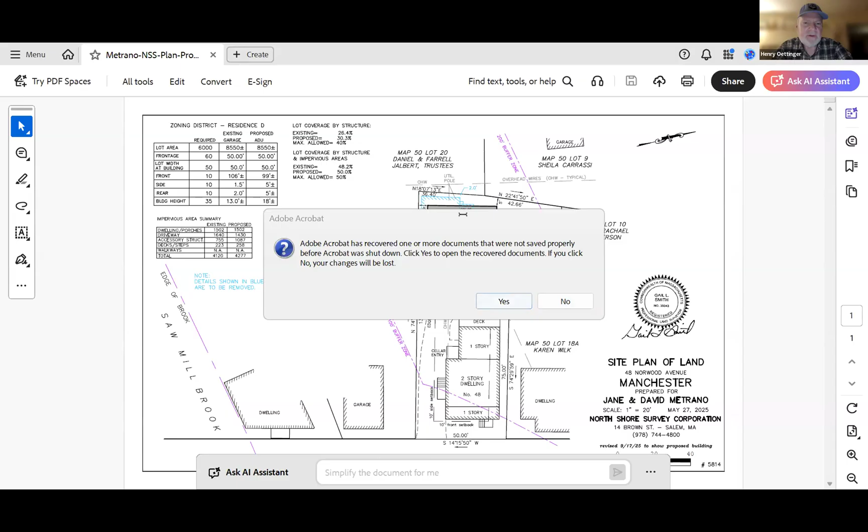The proposed building, Henry, is exactly the same size as what we're planning on doing. We haven't changed anything except for the kitchen layout, and it's moving a little further forward. If you look at the plot plan there to the right, you'll see the existing is outlined in blue, and we're moving it off of the property line to create that required setback.

So there's a decrease in pervious area due to the building itself, but there's probably an offset because of the driveway. And so the net change in pervious area - that's our big question for you, Mr. Gaddis. Net change in impervious area, it's not a lot. See the summary table on the left, impervious area summary.

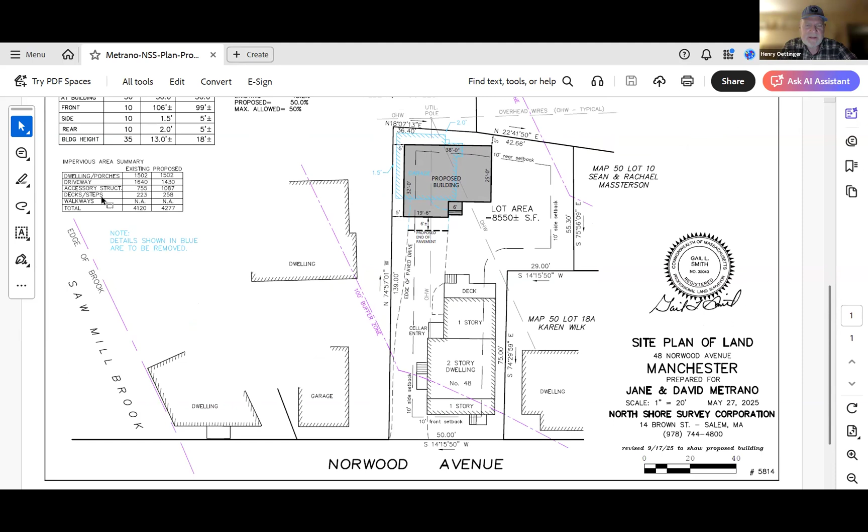But that's now changed, I think, Steve - is that right? Let's see, no, it hasn't changed. So if you look at the driveway, it's 1,640 square feet. We're knocking that down 210 square feet less. Some of which gets covered up by a building, but some of which doesn't.

So the net calculation is that we do lose pervious area by 150, 157 square feet. Got it. So we could certainly require a modest amount of mitigation for that, although I'm not sure where - maybe surrounding the building in the back.

My memory from living there a while ago is that behind the building it's kind of overgrown. Yeah, and there'll be a bit more space there now than previously, so that could become an area for planting some native shrubs, ferns, or ground cover.

Roughly speaking, that would be about 45 by 8, so more than the 157 incremental impervious, by 3 to 2. I'm doing this in my head, so I'm not sure. You're in the ballpark, accurately.

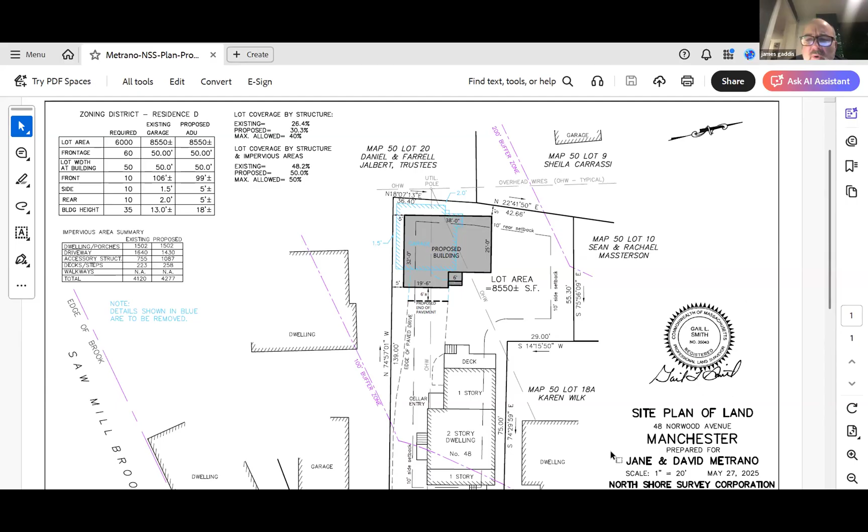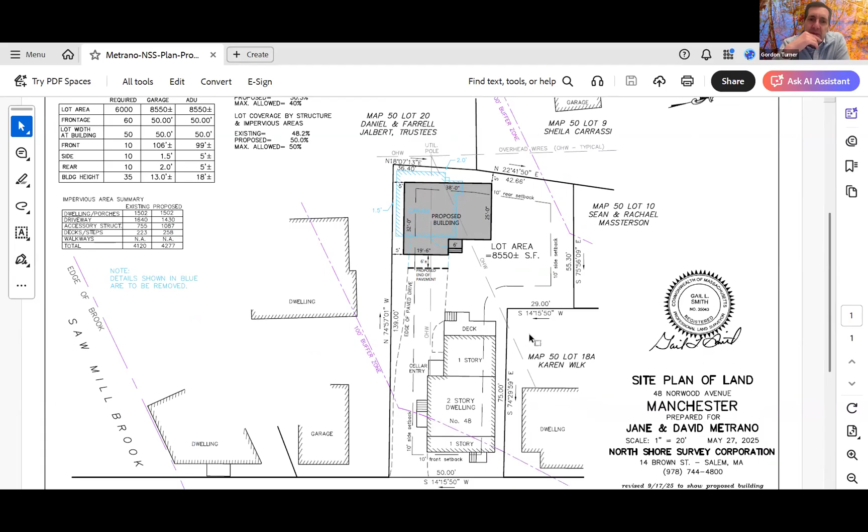So when we were on the site visit, I thought there was talk about moving the pavement and having it stop at the back of the existing house, but maybe you can clarify. It looks here like the pavement goes all the way up to about 6 feet from the house. Is that right? No, that is not correct.

Can you guys see my cursor? No, I see... We need to share the screen, because you're not seeing it if you're not sharing. Oh, okay, we're seeing Bethany's cursor now.

The pavement is not going within 6 feet. It doesn't go back that far in what we're proposing. I'm sorry we did not correct that, but the 100 square feet you're talking about that we're losing, that's where I'm a little confused. I thought we were gaining some, but I think we can make that up by bringing the pavement back. To make up 100 square feet it would only need to go back 9 feet, but we can take it back even farther than that.

What's your current plan, Jim? Is it to end it at the edge of the deck on the existing house, or further down? We don't know exactly yet what the landscape plan will be because we haven't developed it that far. We know that driveway, even through construction and demolition, is coming back. There's no reason the proposed driveway would go all the way back there—cars aren't going to go that close to the building. I'd say it's probably going to be 15 to 20 feet away, which is not marked correctly on that plan.

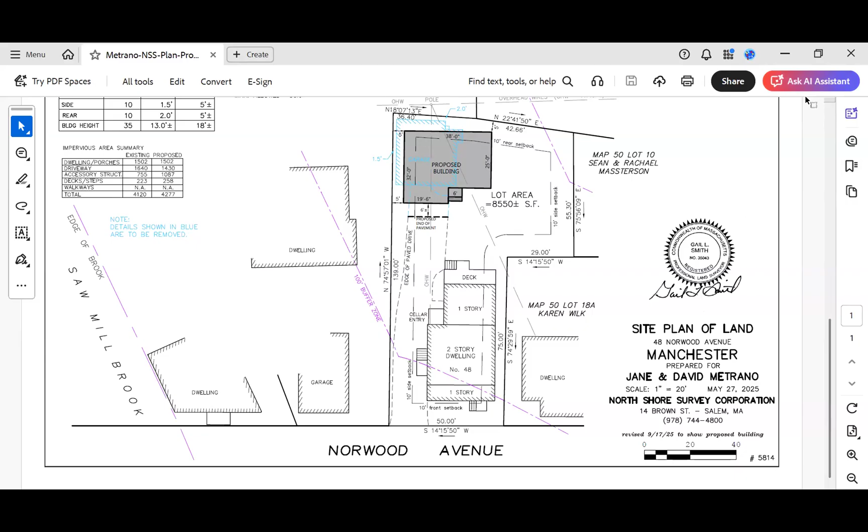Now we have new notices of intent. The first is 146 Bridge Street, Mass DEP 39-943, Jaclyn and Matthew Rossiter. This is proposed patio construction, utility improvements and landscaping within riverfront and the 100-foot buffer zone. We don't have a map and lot, but we'll stipulate that, and we'll also stipulate that notice of this hearing has been published and properly circulated, right, Bethany?

Great, okay, who's here tonight to help us understand this? Good evening, Chairman, my name is Sam Soderholm from Soderholm Custom Builders. We're the builder on the project. With me we have Matt and Jaclyn Rossiter, the new owners. I have Bob Griffin from Griffin Engineering, who helped prepare the NOI, and if needed, we have Troy and Elizabeth from Lombardi Landscape Architects and Patrick Christian from Blue Hour, who is our architect of record.

The Rossiters have gone to painstaking lengths to preserve the home and restore it. We're in the midst of that project under a building permit by right. We did have staff out to review preemptive erosion control and site limit work so that we could get going on certain aspects that are outside of the jurisdictional buffer.

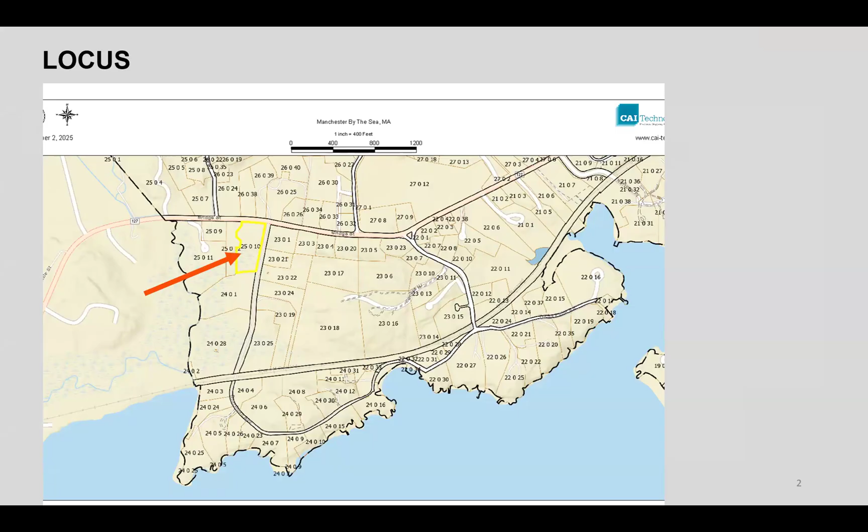I'm sorry about the noise from the phone call. Somebody's calling here.

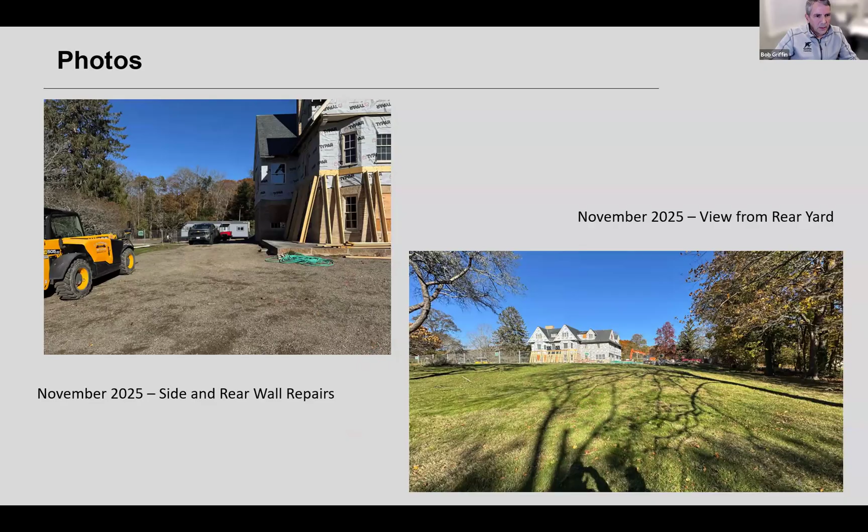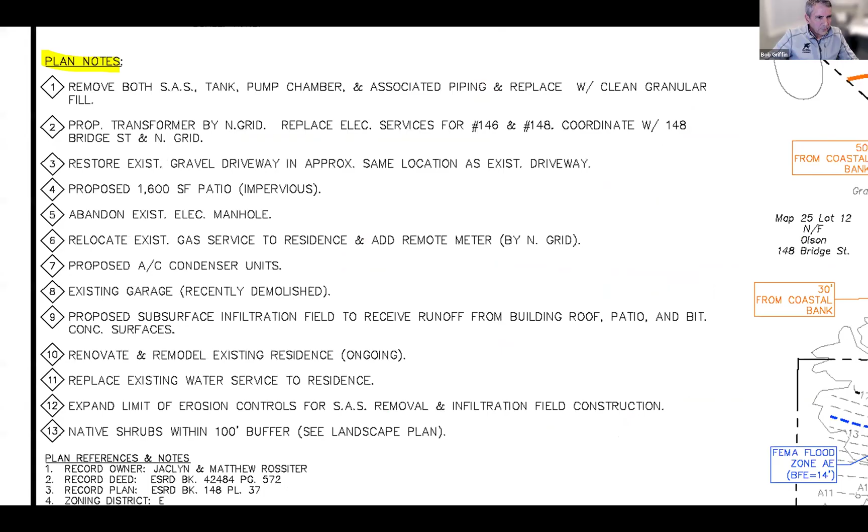We'll go through those as we go through the project, starting at the front of the house. Here's our jurisdictional line again, and the work in the jurisdictional area is a new electrical line, a new transformer—this is in the process of being coordinated with National Grid—and also a replacement of the water line to the house. It's just too small and too old, so it needs to be replaced.

The water line will go in the same location as the existing water line. National Grid will hopefully bring the electric line something pretty close to this. From the transformer, the electric services split between the two adjacent properties here, the 146 and the number of our neighbor—I'll get that before we get too far. So that's the work in the front yard.

There's some work outside of jurisdiction: a new septic system. This is an 11-bedroom house, an 11-bedroom septic system. The circular driveway is pretty much going to remain in the same location as presently exists. There's some new walkways, new shrubs and landscaping around the building. There's a garage addition which recently started construction attached to the house, and there'll be a driveway court installed in front of the garage and a little play terrace behind it.

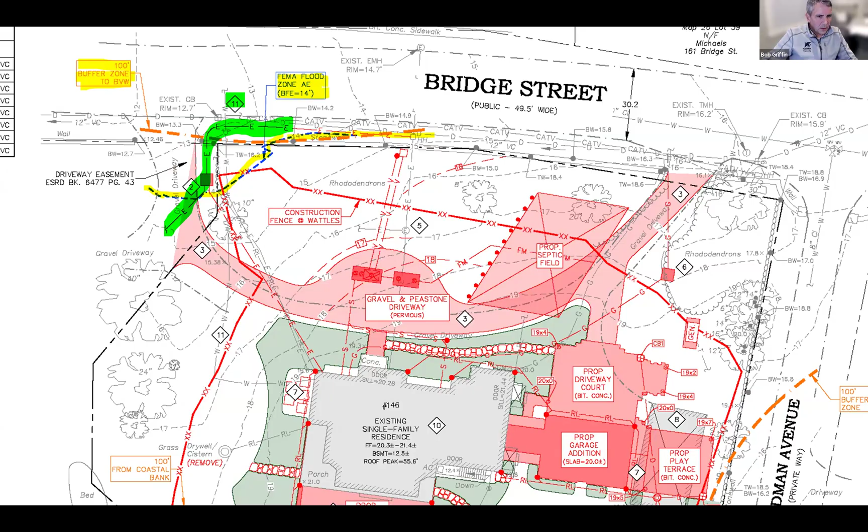I'll next go to the back of the property. The work behind the building that's in jurisdiction—again, here's that yellow line indicating the 100-foot buffer zone. This is about a 1,600 square foot patio. It will be impervious, and it will have some drain inlets to capture the stormwater runoff. It'll have a stone surface, a stone wall around the edge, stone steps and all that—about 1,600 square feet, and it'll enter the drainage system.

This square area down here is about 400 square feet. This is a new stormwater infiltration bed. It will receive the runoff from that patio, and also some runoff from the roof of the building, the garage addition, the play terrace, and the driveway court. So we've got a lot more water going into the ground as a result of our proposed improvements than currently exists.

The other thing, and Sam mentioned this a little bit, is there are two failed septic systems in the back of this property. This shaded rectangle is the older of the two, and then this rectangle here. The goal is to remove the stone, the pipes, the tanks, the manholes, all these cleanouts—there's just a whole bunch of stuff that clutters up the backyard. The goal is to remove those, replace them with clean granular soil, and put down new lawn or loam seed and landscaping in accordance with the landscaping plan.

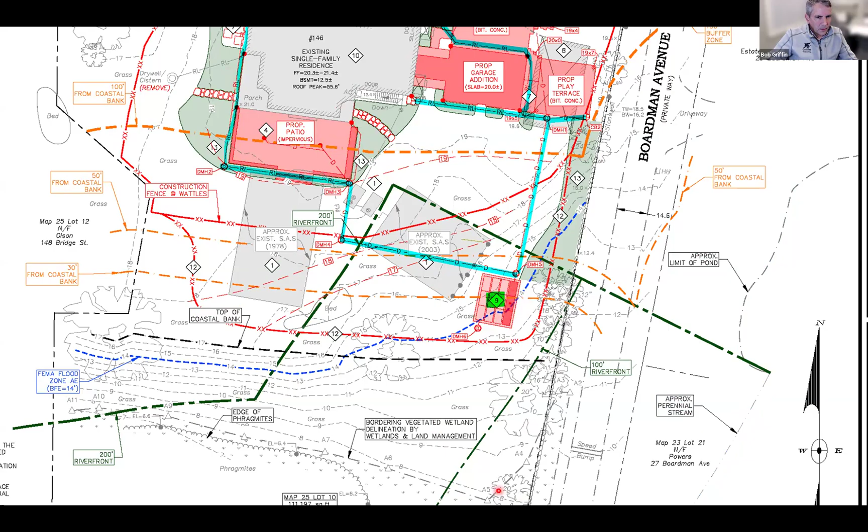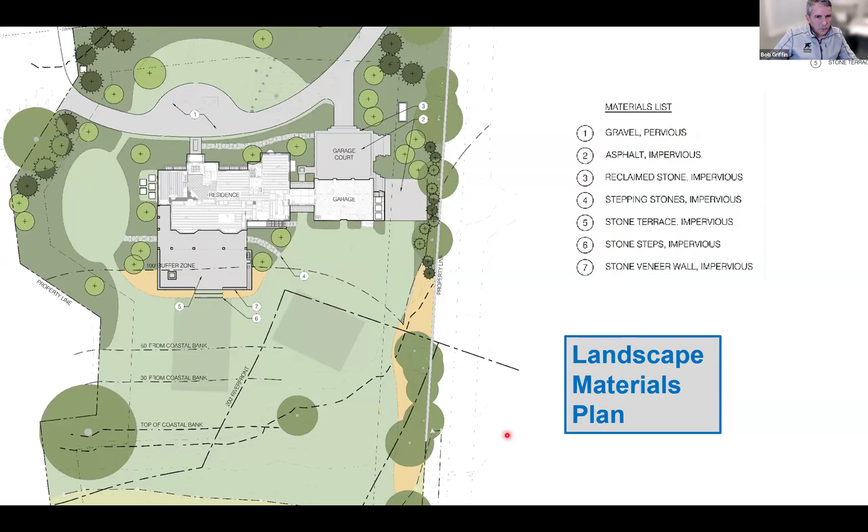That is the stone terrace. Items 5, 6, and 7 all pertain to the rear patio area here. In regards to the landscape layout, we do have some plants which I'll show you in a second, but basically these tannish colored areas are new shrubs along Boardman Avenue. There's also new beds around the entirety of the house.

There are two different shades of grass here. I think this area in the backyard will be maintained more as a conventional lawn like it is now, but there are also some darker green areas here which will be a grass species that doesn't require quite so much maintenance.

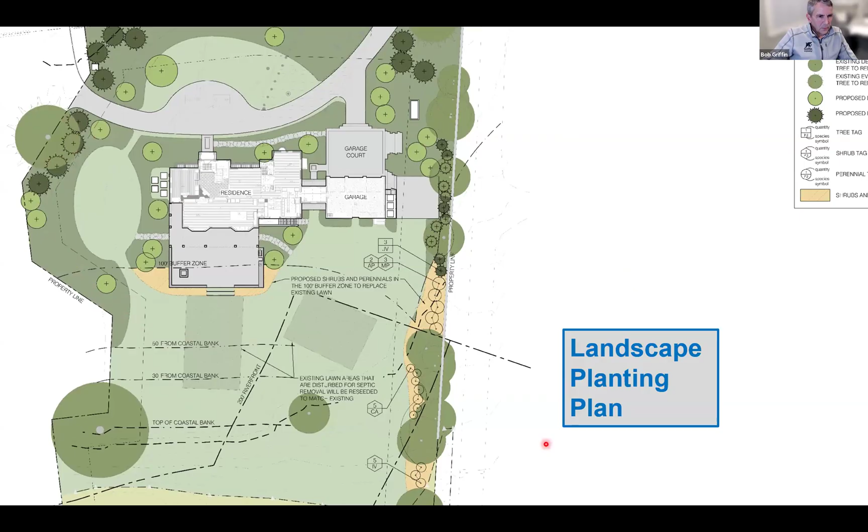Some new trees and shrubs along the property line on the east, as I mentioned a moment ago. The plans we submitted include a planting list with some of the stuff you've seen all the time - summer sweet, winterberry, northern bayberry - and there'll be other plants and shrubs, I'm sure, as the landscaping continues.

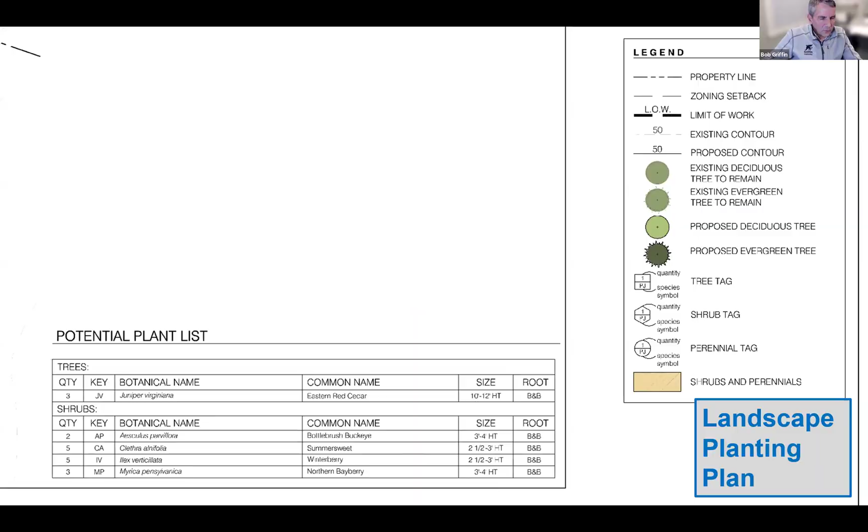I think that sort of summarizes my presentation. We'd be happy to address any questions. Before we do that, I do want to note one thing.

We did note on the DEP website today there were some questions and comments on the filing, and I have some answers to those. I'll quickly run through what DEP had on their list. They wanted us to quantify the temporary and permanent land subject to coastal storm flowage impacts.

So we do have a little bit of work in land subject to coastal storm flowage in the backyard. It's this little portion of the stormwater infiltration bed that is within the flood zone. We're not really changing grades and not changing the surface, so there's no new impervious surfaces back here, but we do have about 200 square feet of work in the land subject to coastal storm flowage in the backyard.

In the front yard we have a new transformer, some electrical lines, and some water main work, a little bit of driveway reconstruction work - about 700 square feet of work in this area out front in the land subject to coastal storm flowage. We'll provide that information in writing to you and to DEP.

They also asked how the mean annual high water line was determined - they're referring to the riverfront calculation, this 100-foot line and the 200-foot line. The way we got that line was by tracing the aerial photograph, and we have good registration on our aerial photographs.

We have a very narrow stream, only a few feet wide, so I feel very good about the locations of our 100 and 200-foot lines. I think they've been accurately defined here.

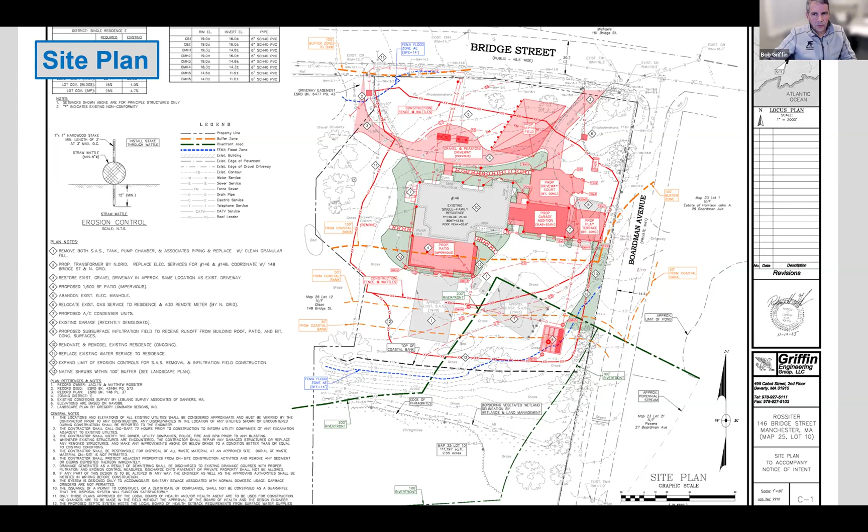Great, thank you. David, you had some questions? I had a question, somewhat related to Henry's. The two failed septic systems - you said you're going to try to clean those up and use some clean fill for those. Do you plan to raise the level of the existing ground with that new fill? No, we're proposing to keep it a nice level backyard. No significant topographic alterations.

Okay, thank you. Other questions or comments from the commission? Any questions or comments from the public? Try to scan the audience here, see if anybody has raised a hand. I'm not seeing any.

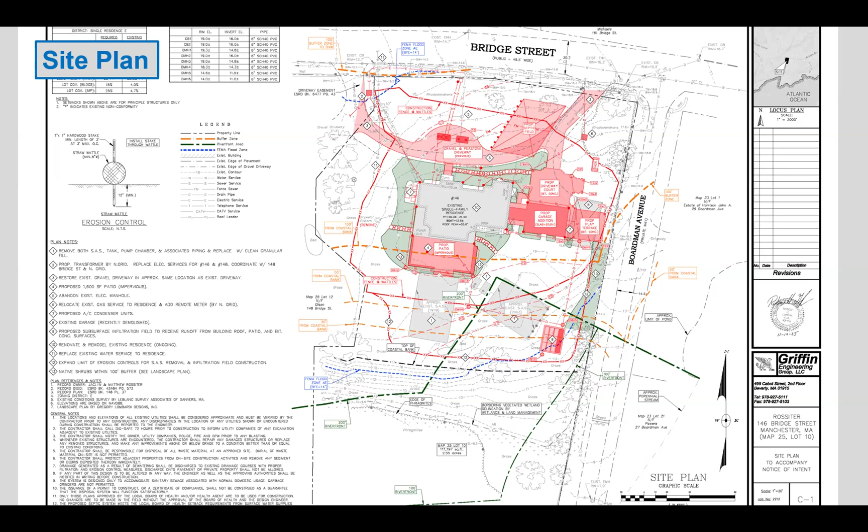Well, given the complexity and detail of this, I, for one, would benefit from a site visit. How do others feel about that? Sure, yes.

So, applicant and consulting team, are you amenable to a site visit for us and a continuance to our next meeting? Yeah, we sort of expected that would happen and we're happy to meet you out there.

We're losing them. David, how about you? I'm not available after 10, but before that, I could do 8 a.m., 9 a.m.

How about Gordon? Yeah, I think I'm available this Saturday. Okay, so that'd be three of us. Henry, you can't. Oh, but I would do it if you have three, and maybe, I don't know, is Jim out of town, or we can ask him, right? Why don't we set it up tentatively then, if that's all right, for 9 a.m. on Saturday, the 6th.

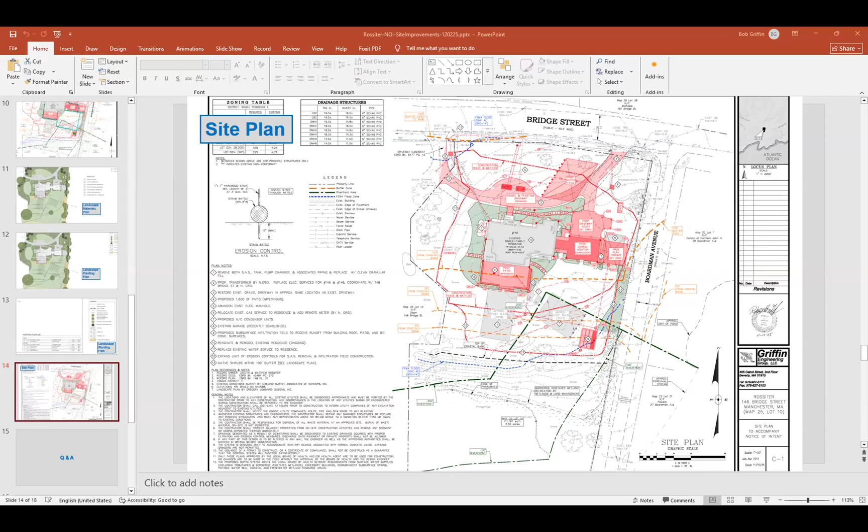All right, this brings us to new notice of intent from 373 Summer Street. DEP file number, I don't have here. Applicant is Kathleen Johnson. The project includes slight expansion of the existing footprint, adding a new foundation within a 100-foot buffer zone.

I have the DEP number. I made the agenda before it updated. It is 039-0944. Great.

Thank you. All right. Well, hello everyone. My name is Tyler Judd. I'm an engineer with Gateway Consultants, and I'll be talking a little bit about this project here at 373 Summer Street. And then I'll pass this off to John if anybody has any further questions.

So this is a pretty basic single-family addition onto the front and the rear. Oh, sorry, I can share my screen if you guys don't mind. Please. Everybody see that?

Yep, all right. So basically, this home is right off of Summer Street, comes down a long driveway. Primary home is right here, and then there's a cottage in the back. And the owner would like to just add a simple addition off to the front overhang of the home and then onto the rear.

As you can see, there's already an existing portion of the home for this addition here and here. But the owner would just like to bump out 5 feet in the back and then a couple feet in the front. They will be adding a new foundation to the front and the rear.

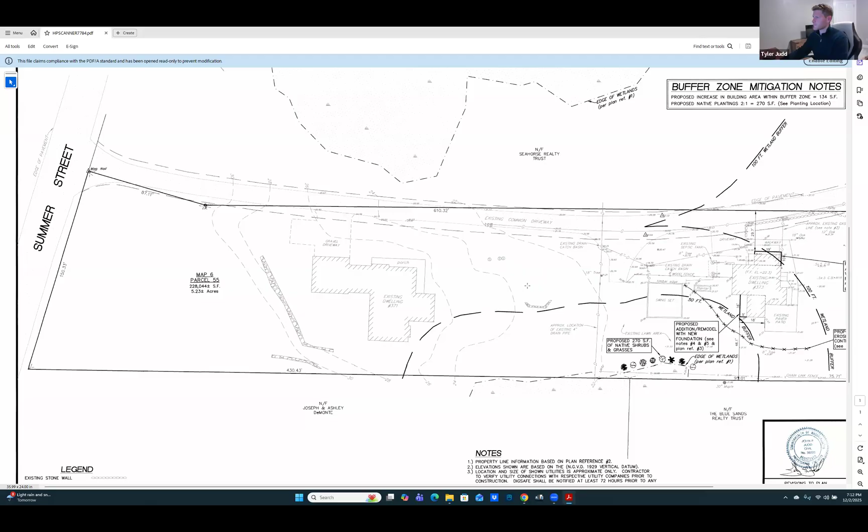Okay. Tyler, is it sewer or septic? This home is on septic, I believe. Does it share with the other home? Yeah, right here we have the 3 sewer manholes. We didn't go crazy on the detail for 371, but this home, the septic components come over here. I can zoom in a little bit. Right here is the septic tank on the side of the house, and then I believe it's pumped up towards 371. Okay, thank you.

Is 371 the new construction? It's not new construction, but in the past couple of years I believe they've done some renovations on the property. 370, if I can add. I'll jump in—371 is brand new. Oh, it is brand new. Yes, I remember doing that and permitting a variety of things there.

But I don't remember paying any attention to the cottage. So the whole point of the cottage—sorry, could you identify yourself please? It's Kathleen Johnson speaking. I'm filing the permit, and so we have 2 sections to the cottage, which Tyler was mentioning.

I wouldn't necessarily call them additions because they are currently there. Unfortunately, there's no foundation, so they're currently falling into the dirt. What we want to do is make this a livable cottage again. We can't salvage what is there, so we're going to take them off, put an actual foundation in and rebuild. It is increasing very slightly from the square footage, but most of the square footage is currently already there—it's just not on an actual foundation.

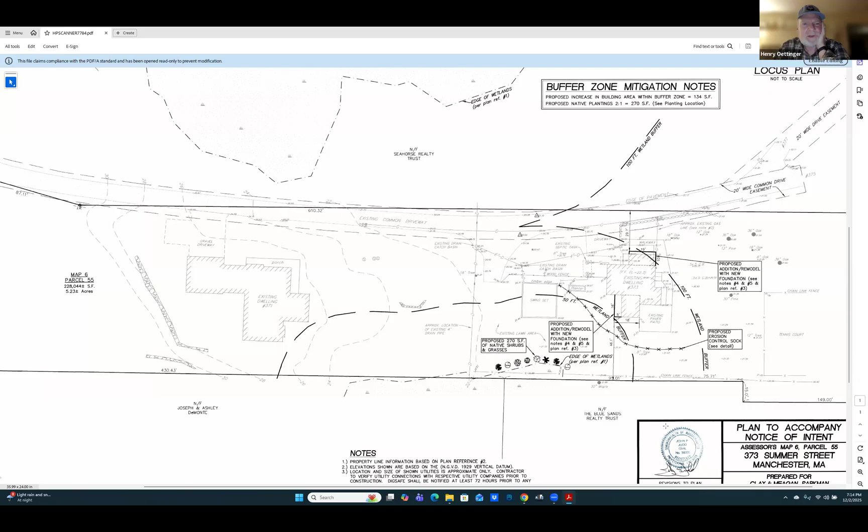So you're pouring 2 new slabs, is that right? Correct. And what foundation is the existing dwelling on? The existing dwelling has an old cellar, like an old stone cellar.

Okay, any other questions or comments from the commission? Steve, I'd like to see this property. I'm a little confused as to what things are gonna look like. Can we make this part of the site visit on Saturday? I think that's probably a good idea if we can schedule it with the folks here.

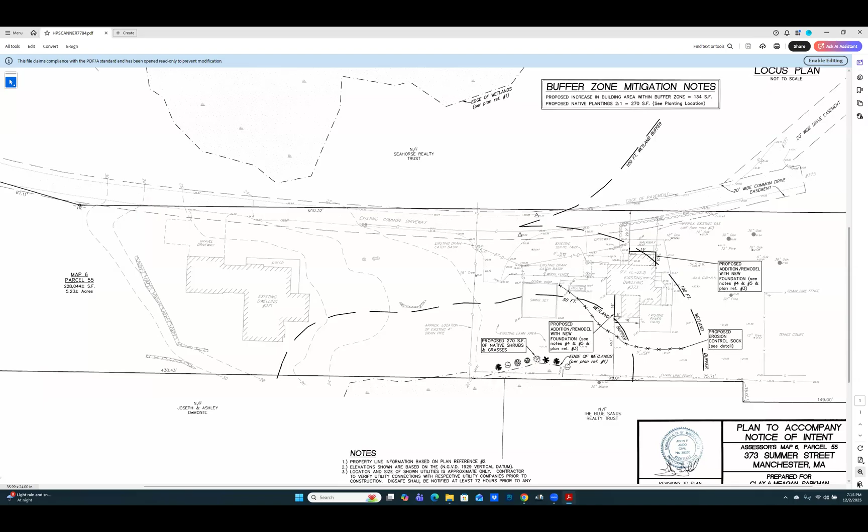I had a question before we do that—I assume this is well outside the riverfront to Wolf Trap Creek or brook. Correct. It wouldn't even fit on the sheet, it's pretty far away. Got it, thank you.

All right, any comment or question from the public? I'm hearing none.

So is our applicant and team okay with setting up a site visit for Saturday morning? Yes, we'll be available whenever you are. So that would be sometime between 9:45 and 10. Let's say 9:45, to be generous with the earlier visit.

Does that work, David, or would we lose you? Yeah, that'll work. It sounds like it's gonna be a quick visit anyway, just a walkthrough. Yeah, I think that's right.

Excellent. Then I'll hear a motion for a continuance, and we'll schedule the site visit for 9:45 on Saturday, December 6th. So moved on the continuance. Seconded. All those in favor? Henry, aye. Olga, aye. David, aye. Gordon, aye. And I am an aye as well.

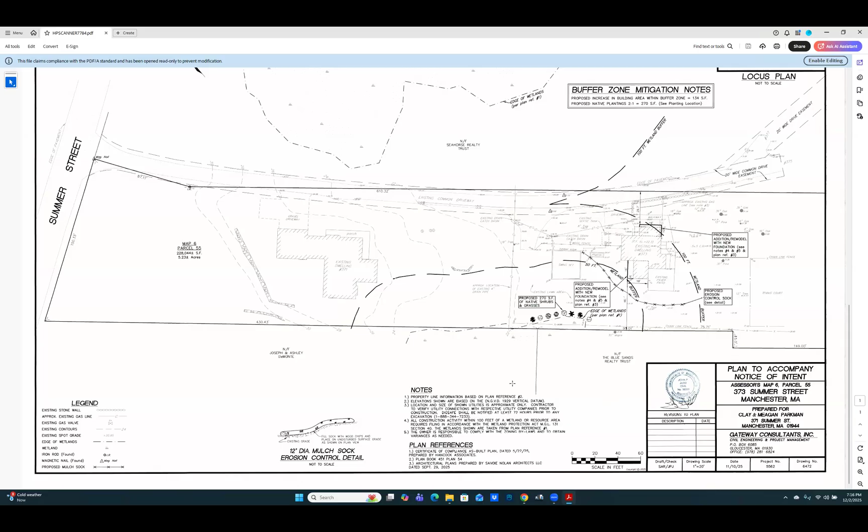Which brings us to another new NOI from the Manchester DPW for Atwater Avenue—proposed roadway and utility improvements on Atwater. Nate, are you here for that? Yep, I'm here for that. Welcome, glad to see you. Glad to be here tonight. So this project, we've got three different components. Two of them are a result of the CST project and provisions or conditions that the planning board placed on CST.

So that was the roadway improvement with the sidewalk, and then the culvert lining portion. Then the other component is extending sewer and water down to Kit Glass Road. The ultimate goal, some of you may be aware, is we're looking at moving the DPW and or public safety up to the 197 School Street property, where Black Earth was previously located. In preparation of that project, we'd like to extend those utilities up to Kit Glass before we ultimately pave it, which is a condition of the CST work.

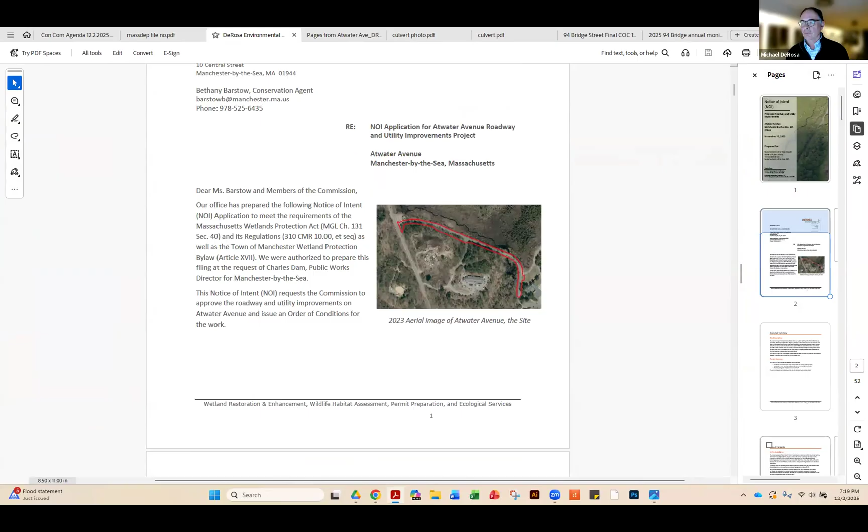I'll share my screen if that's okay. We do have a file number with no technical comments from DEP. Can everyone see my screen? Yes, so essentially, as Nate said, we're doing roadway and utility improvements on Atwater Ave. I'll zoom in here so you can see where we're at. School Street is here, Atwater Ave comes off of School and heads back to the MAC. The garden center is out front. Basically the work is all within the street layout, all within the roadway.

We have lots of resource areas, mostly bordering vegetated wetland and buffer zone to bordering vegetated wetland, and then riverfront area, a 200-foot riverfront area from Sawmill Brook. Those are the resource areas.

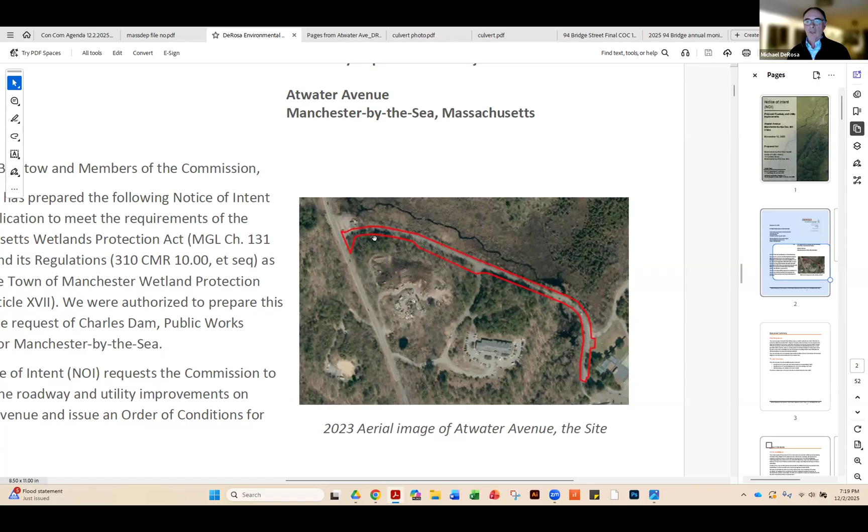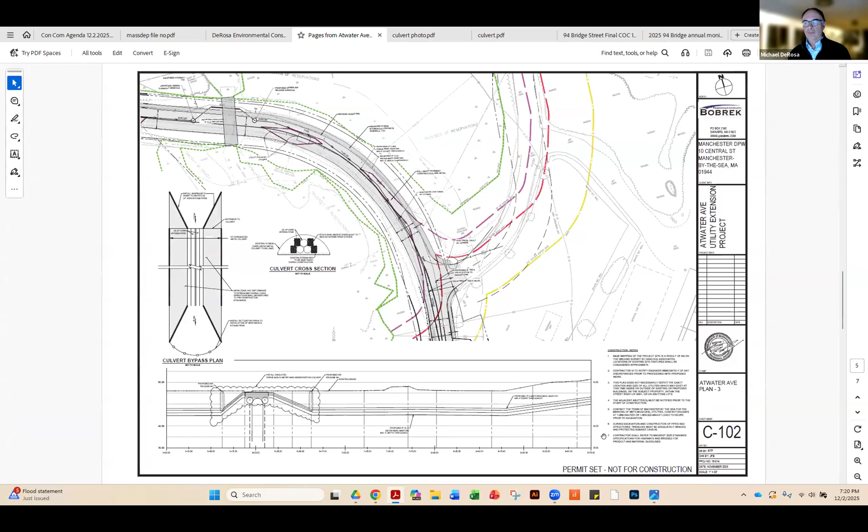Likely this work will be done this summer, probably during a low flow period. We'll use sandbags to channel the water to the center of the channel, and then there'll be three stacked 24-inch bypass pipes, just culverts stacked there. So the water will flow through the middle, and that gives us two work areas on each side to spray the culvert with concrete.

It's a cementitious shotcrete liner that has a fiber mesh, which provides additional strength, giving strength and support to the arch culvert. Then the pipes will be removed, the bypass pipes and sandbags will be removed. So it's all temporary impacts.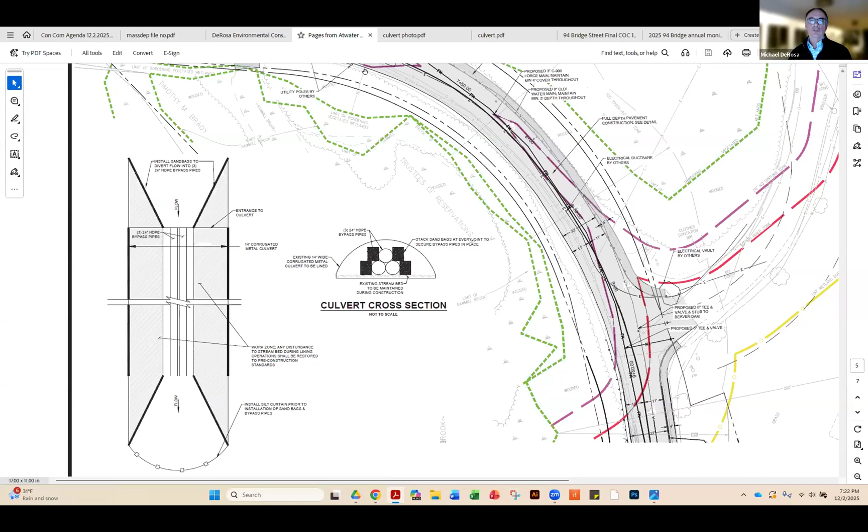Essentially that's it. Again, everything will be done in the street layout. The street's going to be repaired. Utilities will come over the culvert, so they're going to thermally insulate them—it'll be water line and sewer—so there won't be anything going underneath it. That'll all stay as it is. So we can take questions if you want. Nate's here, he knows more about it than I do at this point.

Could you show us the layout in a little more detail, for the sake of brevity? I'm curious about the position of the proposed sidewalk. There's a proposed sidewalk on this side, I believe, Nate, is that right? Yep, the north side. And that allows pedestrian access all along Atwater. Yep, and that was per condition for CST's planning board approval.

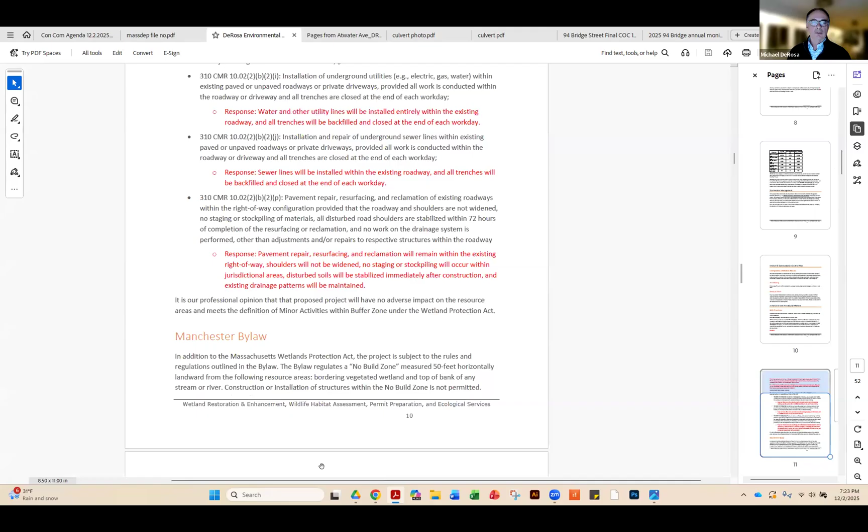Will that be within the current envelope of the existing roadway, or are you going to extend? No, it'll be extended, yep. It would have to be, it's a turf area now. I don't know if I have photos in the NOI or not. There may not be any photos there. I didn't see any. No, typically we do, but not in this one.

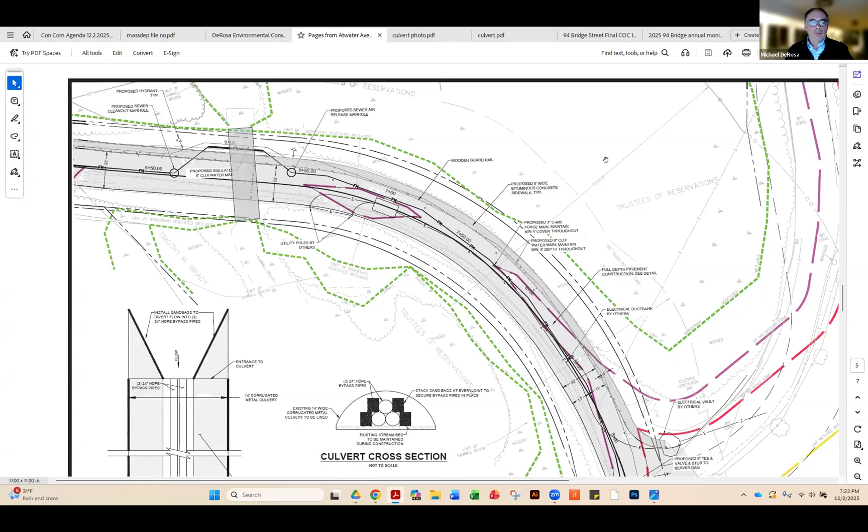I'm curious about that because I think it's kind of tight quarters on the resource, although I didn't see your delineation yet. Yeah, we could certainly do a site walk, this is not a rush by any stretch. The work will be done in spring or summer. We can see the green is the resource boundary. So we've got the guardrail there, and I believe the sidewalk's on the other side of the guardrail. Yeah, we tried to keep it as tight to the existing layout as possible through the whole corridor, but like you said, it's definitely quite close in some locations.

Well, how do commissioners feel? Do you have questions now, or would you like to walk this and see it for yourselves? I'd like to walk it, even though I travel on it almost every day. It's a very different experience to walk down it. I can tell you from having done that with the CST proposal and Hancock when they were delineating.

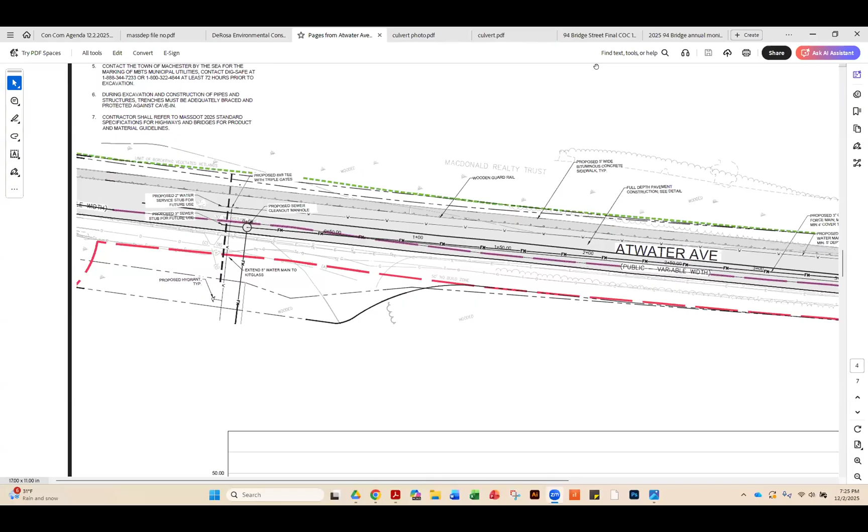Just as an aside, is there still beaver activity on any side of that culvert? There was quite a lodge and an attempted dam around it. Well, these pictures were last week, so I didn't see any activity. Yeah, it's been a couple years since we've had any. You can see a debris pile, but that's it. Looks like the lodge is gone.

Okay, well, we could schedule that for 10:30 on Saturday. Make it a threefer. I'm unfortunately out of town this weekend, so I won't be able to attend. I can be there, so that's fine. Fine for me. Great.

Thank you. Is there any way we could go earlier than 10:30? You want to do it before the 9, like an 8:30 visit at that one? That would be good for me. Yeah, I can be there. Yep, I can do that too. Okay, great. All right, 8:30 on December 6th, Saturday, regardless of the weather. There's no such thing as bad weather, right? Only bad clothing.

Thank you. And let me just check and see if there's any public comment on proposed work at Atwater Avenue by DPW.

All right, then, I'll hear a motion to continue to our next meeting and to schedule a site visit for 8:30 on December 6th. So moved. Seconded. All those in favor: Gordon, aye. Henry, aye. David, aye. Olga, aye. And I'll join you. It's unanimous. Thank you, Nate. Thank you, Mike. Thank you everyone.

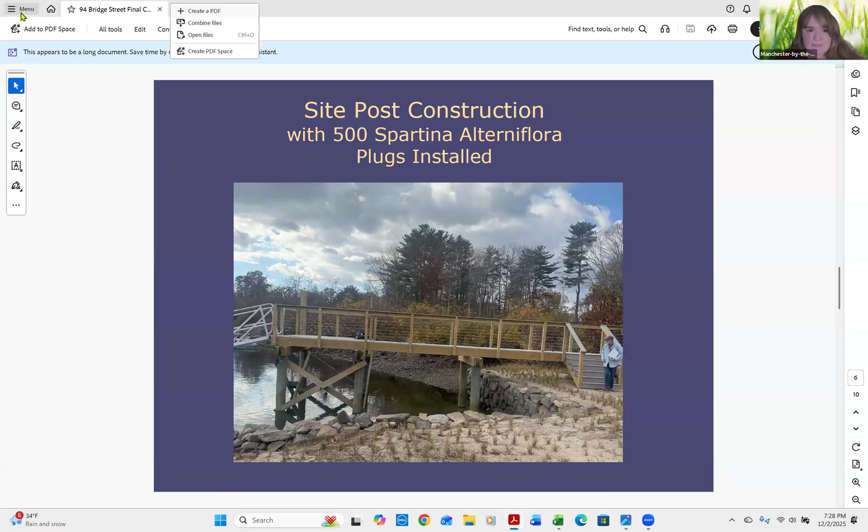Okay, so we're here requesting a final certificate of compliance. As you might recall, we appeared before the commission in January to request a partial certificate of compliance for the pier, float and gangway, and the seawall work. But your order of conditions required a 2-year monitoring of the salt marsh. So DeRosa finally completed their monitoring, and they submitted their second and final monitoring plan to the commission late October of this year. That's why we're now seeking a certificate of compliance for the whole project.

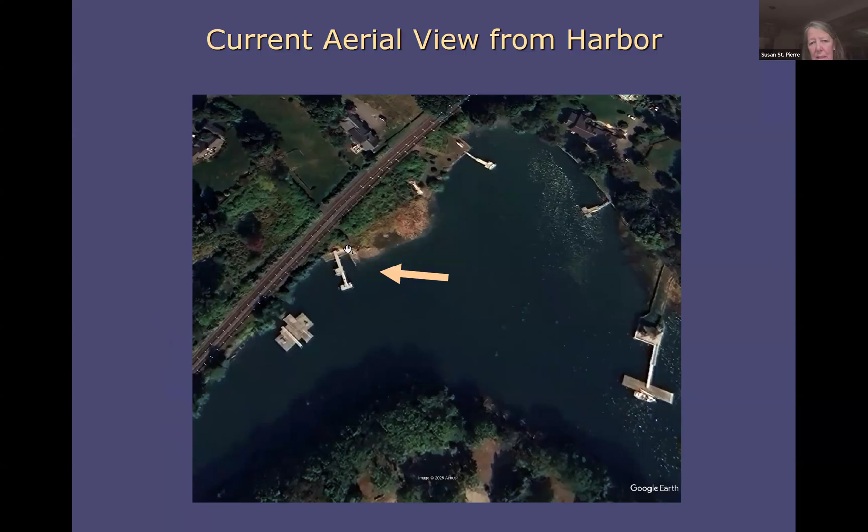This is an aerial view showing the property here. And as you might recall, there's an easement on the adjacent property, which is how they gain access down to the waterfront and across the MBTA tracks. And this is the wall, you can hardly see it. And then that's the pier that was constructed.

The pier and the seawall were completed in the summer of 2024, and as soon as that was completed, the salt marsh plantings were installed. The first salt marsh monitoring plan was submitted to the commission in October of 2024. As I just mentioned, the partial certificate of compliance was issued this past January. And then the second and final monitoring plan was submitted about a little over a month ago.

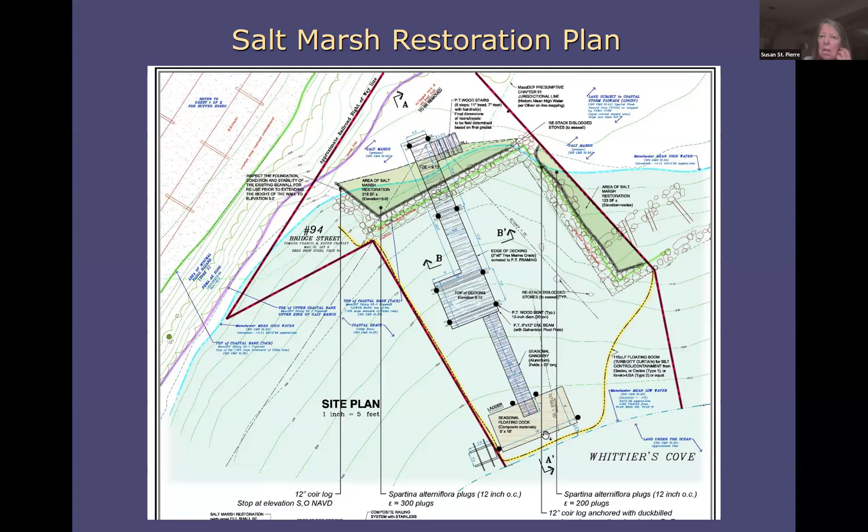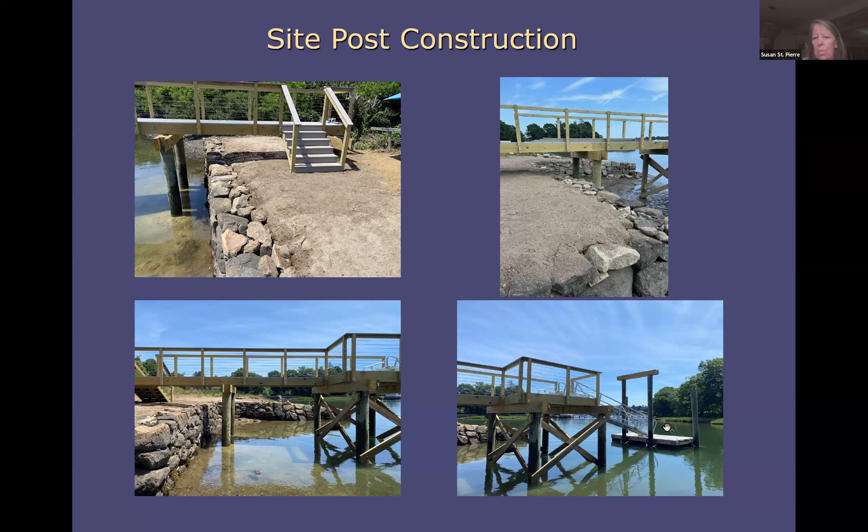This is the site when the seawall was completed, the pier was installed, and the site was graded. As you might recall, we had to put coir logs in here, and they also put in coir matting to accommodate the plantings. Here's a view of the pier going out to the platform, the platform gangway and float. This is an image of the site once the 500 salt marsh plugs were installed.

Susan, I can only see sky in this one, the upper left. Really? I can see the whole thing. Okay, just use your cursor. You can just scroll down, hover there, above. Yes, okay. Is everyone else zoomed in? Yes, now I'm good too. Thank you, that wouldn't be helpful just seeing the sky.

So that shows all the plugs after they were installed, and these are the September photos. The report they recently submitted included photos from the previous year as well as this past September. The salt marsh is taking pretty good, and they're very happy with the results as it continues to grow and expand. You can see the coir matting and the plugs coming through it, and it's even growing under the pier, which is a bonus. It's having a tougher time here because of incoming tides during high tide, but it is growing. Special condition 29 required the 2-year salt marsh monitoring and imposed a 75% survival rate, and DeRosa's most recent report found a 75% survival rate.

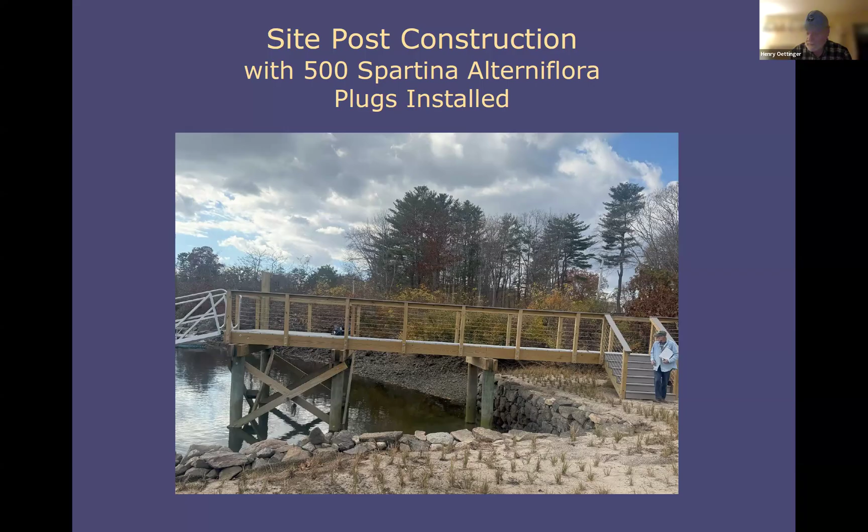Awesome. And Mike, in your photo 12, there's a little bit where some of the Spartina didn't take. Is that because of water, high tide, or what do you think? Because of high tide and probably some erosive forces there, but you can see where it got established.

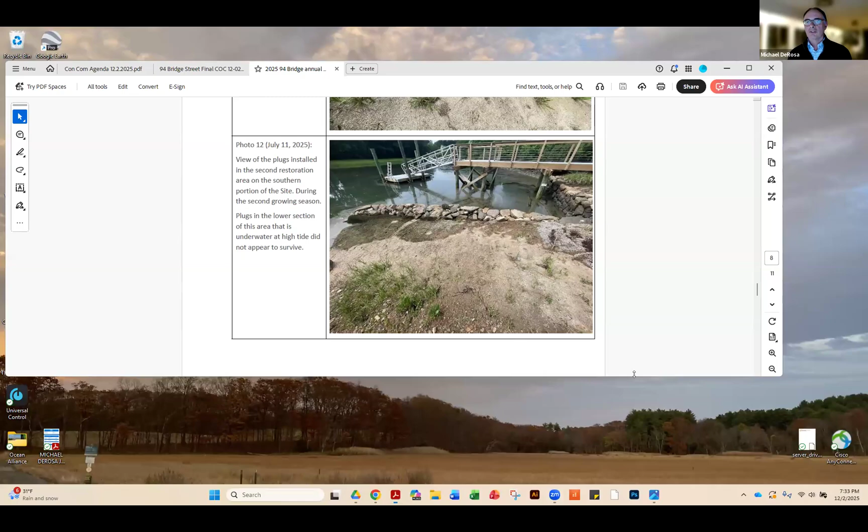I can share my screen, Susan, if you want. Sure, I've got the same picture. I allowed it. Yep, I see it. Oops, sorry, my thing's going everywhere. Thank you, Bethany. Can you see it now? Yeah, yes, this is the one, right, Henry?

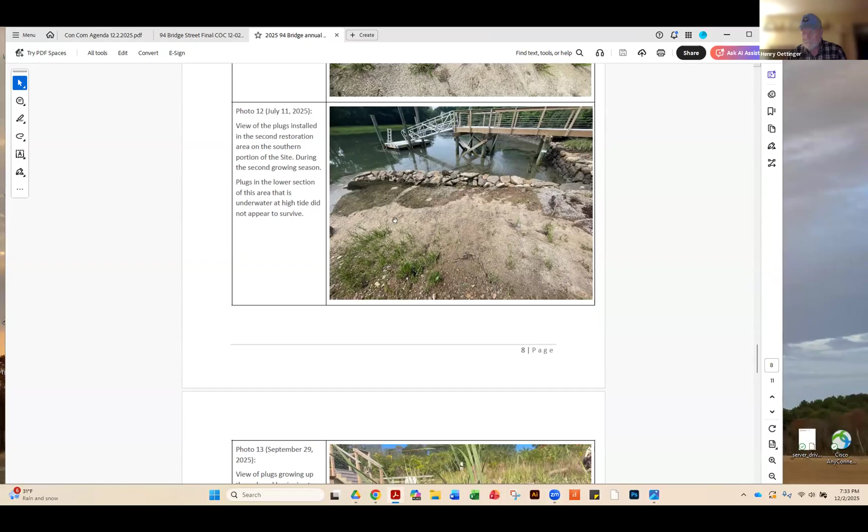Yeah, so it's establishing here and here, and you can see how these runners are heading out, so it is going to expand into that area. It just had a rough time the first couple of years - we had some storms that I think undermined it and washed it away, even though we used heavy coir mesh to lock them in. But they're doing well, and you can see that.

Let me get my little pencil here. You can see how they're in a row - those are runners from the originally planted plants, so they're spreading there, and same with these. So they are getting established. I'm pretty happy with the outcome.

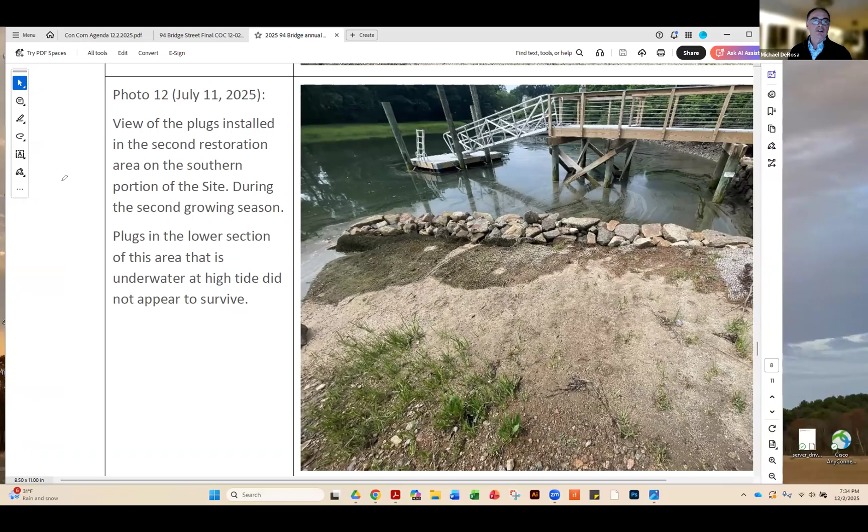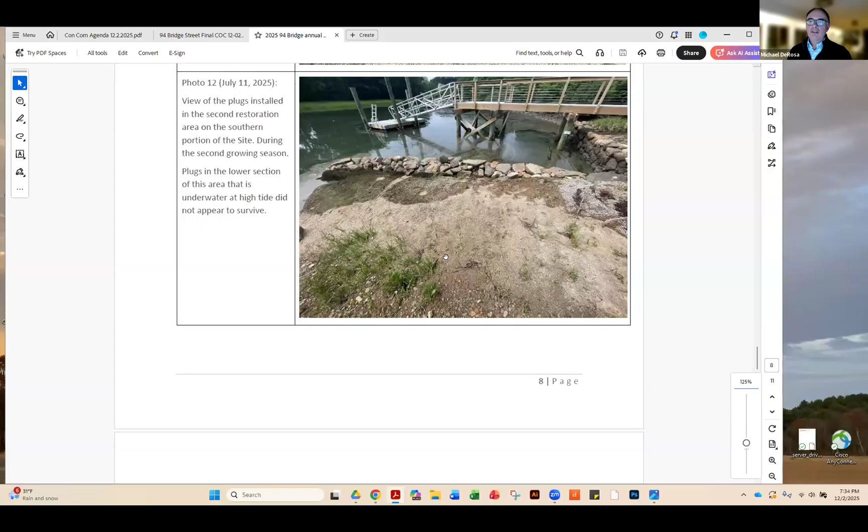Yeah, I think most of it looks great. That rough spot - are you not worried that anything should be done for that area in the shorter term? Here's other shots that show them expanding. No, the rest look good. So I think not for now, there's not much we could do now. We'll just watch that. We always take these projects like they're our children, and we keep watching them over time to see what happens. So I'm happy with this, and I think the full and final certificate of compliance is warranted.

Great, thank you. Any other questions, Steve?

As the applicant, I'm just curious about the timing - it sounded like maybe it's only been 1 year with two observations a year apart. Can you comment on when the initial plantings were made and how much time has elapsed? That should be in the report. I think the plants went in July 2023. Oh, it's been that long - I must have made a mistake in the presentation. Sorry. Okay, thank you, yep, sounds entirely kosher.

Bethany, any comments from your standpoint?

I took a site visit last Tuesday with Mike, Susan, and the applicant. Even though it's not a great time to look at the vegetation in November, I could still see them spreading out. They pointed out to me where they were spreading underneath the pier. So it looked good to me when I was there.

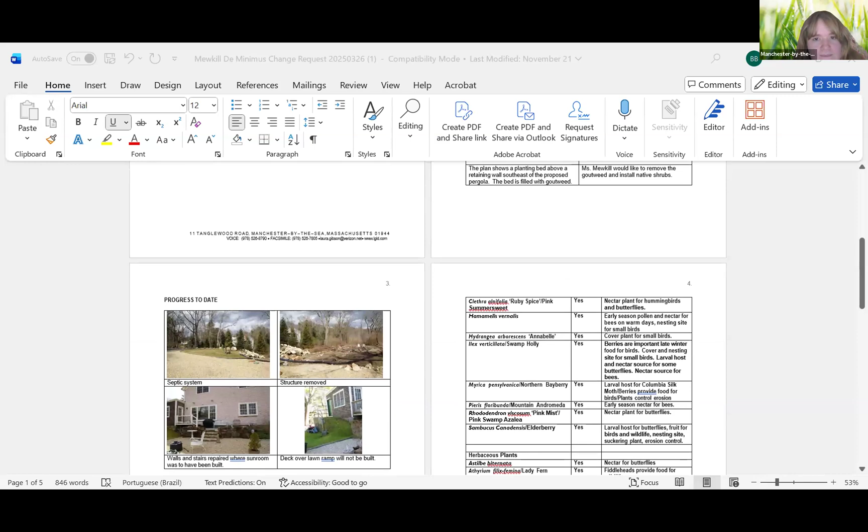This is the letter, I know she did two letters. Trying to find it. Okay, hold on, sorry.

This is what she wrote. She was saying that they're going to move this—this is the second de minimis modification she's going to do—and that they're going to remove the existing structure from the existing footprint, so it is 2 feet outside the 30-foot no-disturb zone. The previously approved structure was within the 30-foot no-disturb zone. She said they're going to further reduce the impervious surface area by 512 square feet, and the newly proposed structure will have 448 square feet.

Okay, how do others on the commission feel? Is that sufficient information to proceed? I'm not hearing any objections. Silence being acquiescence.

Okay, so I will move we grant a de minimis change as requested for DEP file 39-821, 15 Eagle Head. Is there a second? Second. Thank you. All those in favor? Henry, aye. Olga, aye. David, aye. Gordon, aye. I'll make that unanimous.

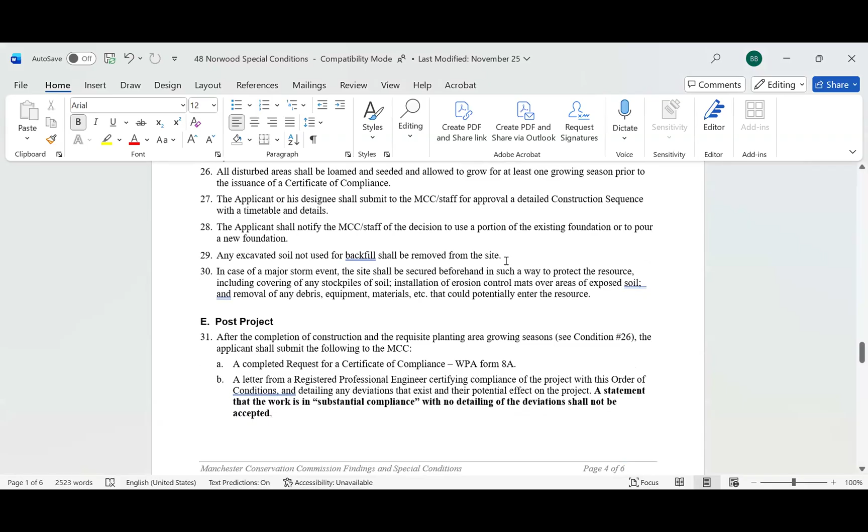I think just given the lack of clarity with the drawings and the numbers and stuff like that, it would just be nice to have an updated plan that accurately reflects that. That's a very good idea. So they can figure out which he said he would do.

Yeah, he said he would do that, but maybe we condition that. Right. All right, so the condition will be to provide an updated plan to reflect changes, demonstrating that impervious coverage is the same or reduced, and obviously the new location of the building.

Can someone tell me the difference between an accessory building and an ADU, other than the accessory building has no kitchen? Correct, so it can't be used as a separate habitation.

ADUs are fully permitted by function, but they're limited in size, and the zoning district the Matronos are in limits it to 700 square feet, and they want 1,000 square feet, so they can't come in as an ADU. They had talked about connecting it to the house with a breezeway, but then it's just an expansion of the single family residence, so they opted to go with accessory and eliminate the kitchen.

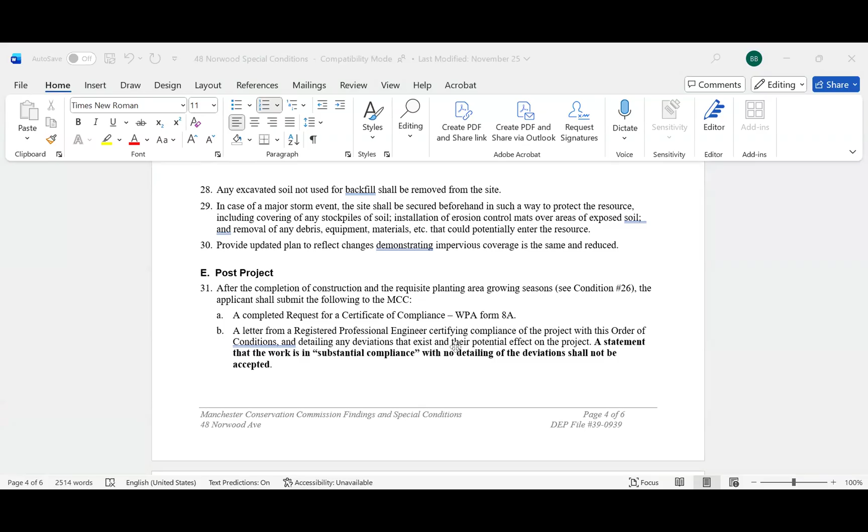All right, I'll hear a motion to issue an order of conditions for 48 Norwood, 39-0939. So moved. Seconded. All those in favor? Gordon, aye. David, aye. Olga, aye. Henry, aye. And I am an aye. Great.

Comments on the minutes? I can make two global comments. One is they're wonderfully written. I didn't catch hardly any misspellings or grammatical errors. Somebody's really put in some effort.

Go Kendall. The other global comment is that if we're going to call people who have a doctorate doctor, we should do that right straight through. So it's not Ms. Hayes moved and Mr. Turner seconded, it'd be Dr. Hayes moved. But that's an easy global replace.

And I saw one thing, Bethany, in one of the November meetings, it might have been the 12th, at the very end there was a discussion about meeting dates for 2026. And it said every 3 weeks, meeting on Wednesday, and I think that should be Tuesday. Is that right? Yes. All right, just double check me on that.